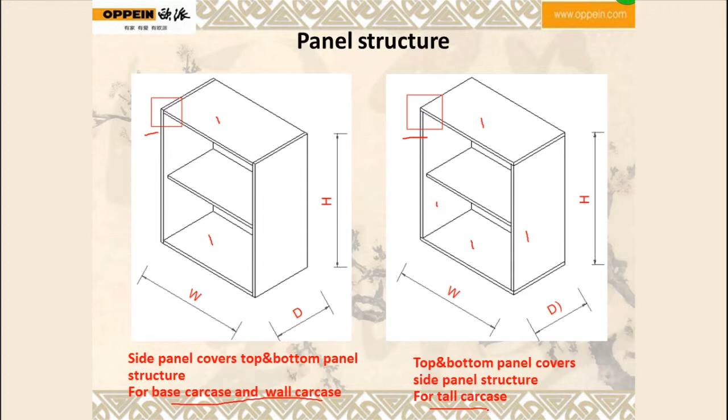Rotary door base carcass. This is the standard structure. This panel we call left side panel, and this is called top strengthened panel, and this one is thin back panel. The thickness is 3 mil. And this one is right side panel, this one bottom panel, this one adjustable shelf, and this one is aluminum rail.

On the right side here are the elevations of the rotary door base carcass. This is one door and this is double doors. And the dashed line, this one and this one, means that the hinge is assembled in this side, and this one means the adjustable shelf. So this one is left open, this one is right open, and this picture, the structure is K04 structure.

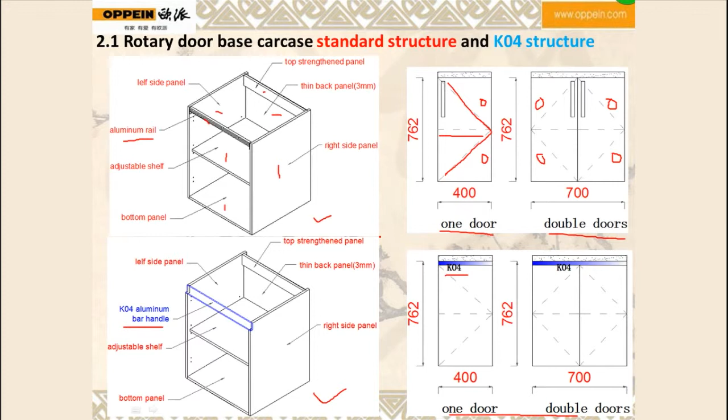Drawer or basket base carcass. This is the standard structure. The difference from the rotary door base carcass is that the drawer base carcass has no shelf, and here have a lot of assistance holes for installing the drawer or basket.

So here is the elevation for drawer or basket cabinet. This is the drawer code, and this is the drawer code. This is the code of multifunctional pull-out basket. This is the code of bowl and plate pull-out basket. This is the code of flat pull-out basket.

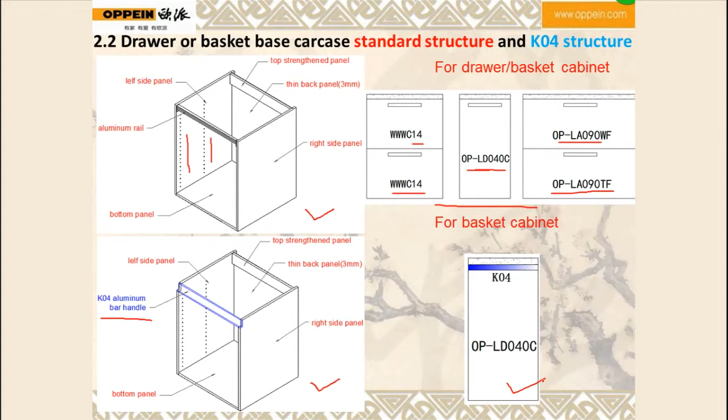And this one is K04 structure. The K04 aluminum bar handle here. And this one is the elevation. Base carcass K04 structure without shelf. K04 aluminum bar handle, have two. So it is for drawer or basket cabinet.

Just like this, this is two small and one big drawer. And this is double drawer. And this is double baskets.

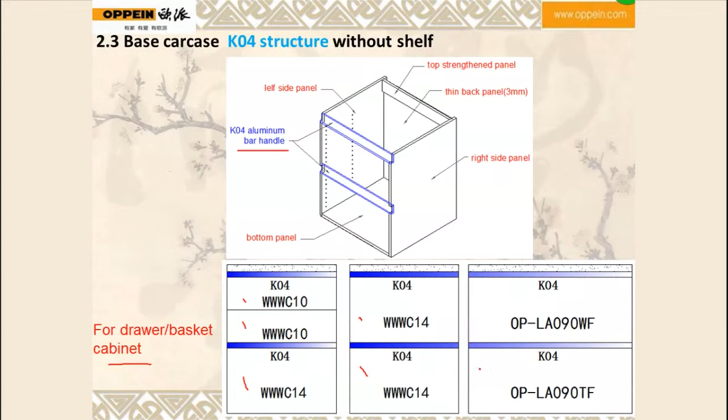Sink carcass. Sink carcass has no shelf, no back panel, and the top strengthened panel is in the back, and on the bottom panel there's a bottom strengthened panel. It is with aluminum foil, and the bottom panel is also with aluminum foil for protecting the panel from moisture.

This one is the elevation of the sink cabinet, and this one is the K04 structure of sink carcass, the elevation.

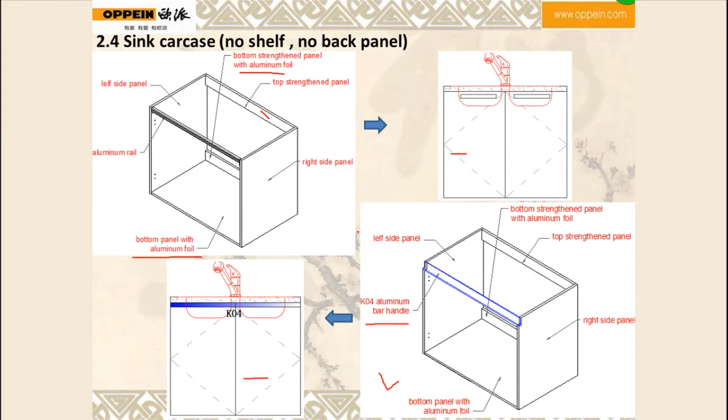Stove carcass. Stove carcass has a vent when the width is more than 600 mil. This is the vent for ventilation. This is the standard structure elevation. And this one is K04 structure, and this is the elevation.

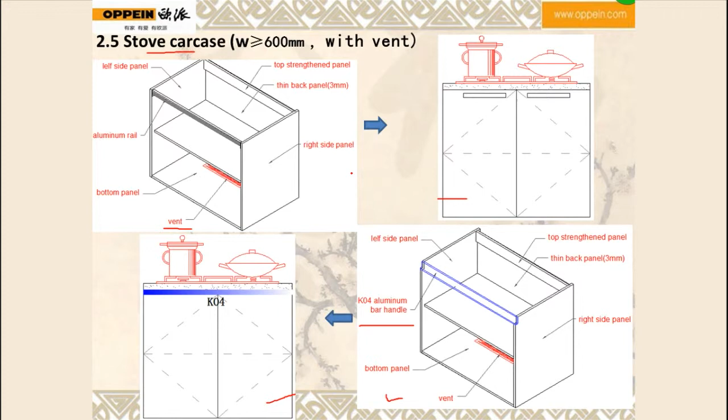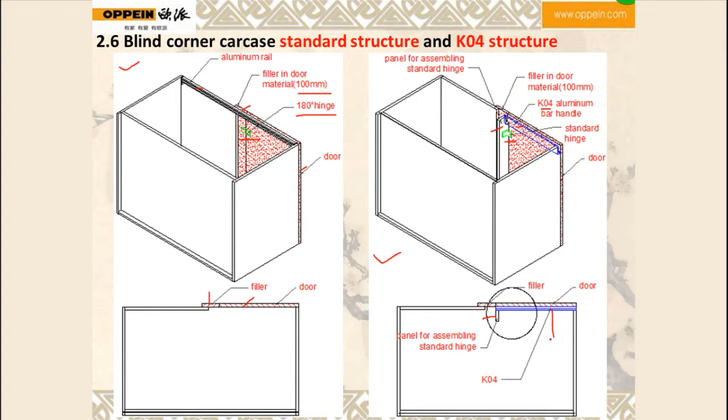Blind corner structure cabinet. This one is blind corner door cabinet. The notes are as below: 1. Standard structure uses 180-degree hinge. And when it is K04 structure, it uses standard hinge.

This one is lazy Susan basket cabinet. The notes are as below: 1. The back panel is thick back panel, thickness is 16mm. 2. The width of this cabinet must be over 900mm. The net depth, meaning the inside depth, must be more than 500mm, and the net height must be more than 550mm. 3. The door width must be more than 400mm.

4. No hinges. And this one is 180-degree turning basket cabinet. The notes are as below: the width of this cabinet must be more than 900mm, the net depth must be more than 500mm, and the net height must be more than 620mm. 2. The door width must be more than 450mm.

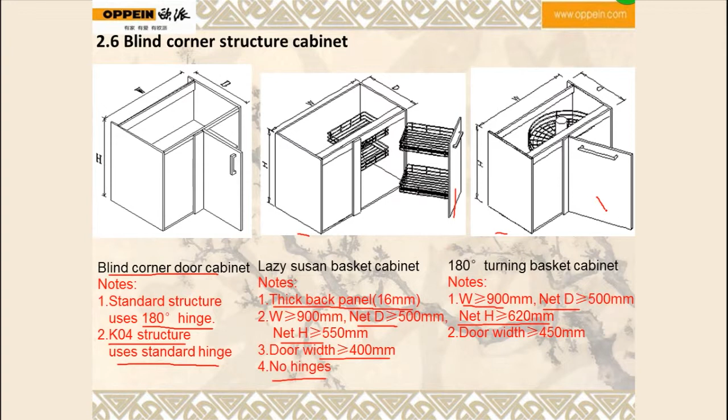Base corner cabinet. This cabinet is bifold corner cabinet, or we call it L-shaped corner cabinet. The notes are as below: 1. No aluminum rail. 2. With 3mm back panel on one back side. This one is 3mm back panel, and this one is 16mm back panel.

3. The doors that connect to the carcass, this one uses 175-degree hinge. The other one, meaning this one, uses bifold hinge. The code is BM-J14, like this.

And this one is angle corner cabinet, or we call it diamond corner cabinet. The notes are as below: 1. With top panel. 2. No aluminum rail. 3. With 3mm back panel on one back side. 4. The door uses 45-degree hinge, the code is like this. 5.

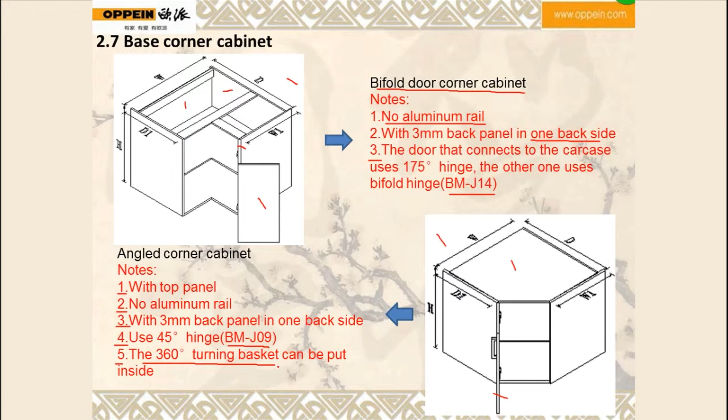This one is excircle corner cabinet. The notes are as below: 1. With top panel. 2. No aluminum rail. 3. With 3mm back panel on one back side. 4. Use 175-degree hinge. Here, the door used 175 hinge.

5. The incircle radius of this door is 300mm. The incircle radius is 300mm, cannot be changed. And only lacquer, acrylic, and this material can do.

6. Mind the handle. The handle in this picture is a 2-hole handle. So when we use a 2-hole handle, it must be vertical, like this. Or we can choose a single-hole handle. Or we can use an arch K04. Arch K04. 7.

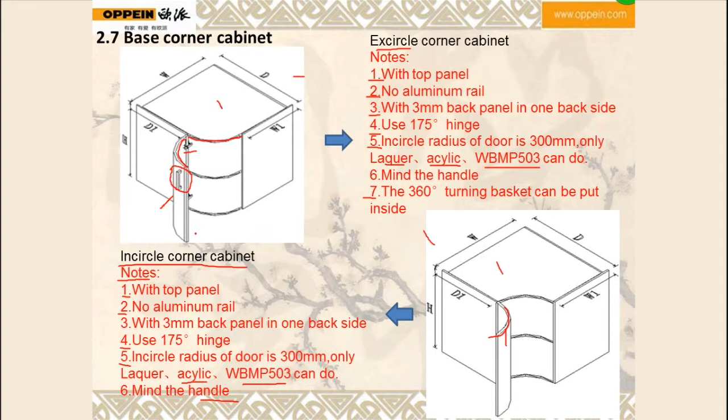When we use these corner cabinets, we need to make sure that the angle of the wall corner is 90 degrees.

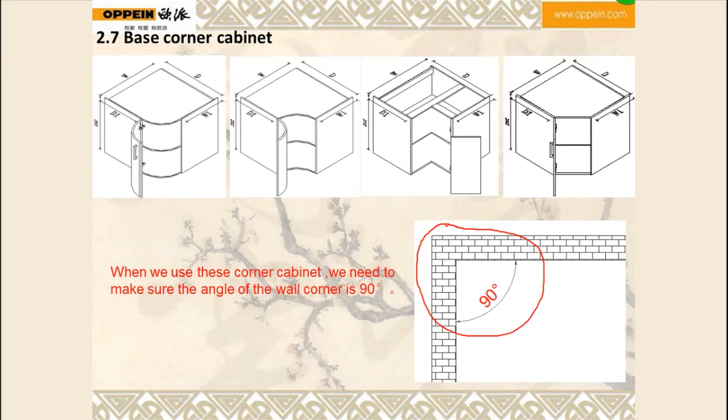Oven carcass structure. The standard structure of oven carcass has a 3mm back panel. But if you don't want it, you need to tell the factory. The form is about the installing way of the aluminum rail for the oven carcass.

There are 3 circumstances. Number 1, when the height is more than 720 and when the base carcass has oven, sterilizer, microwave inside, as picture 1 shows. Picture 1, this is oven. Then the installing way of the aluminum rail is vertical, and there's a filler above the oven.

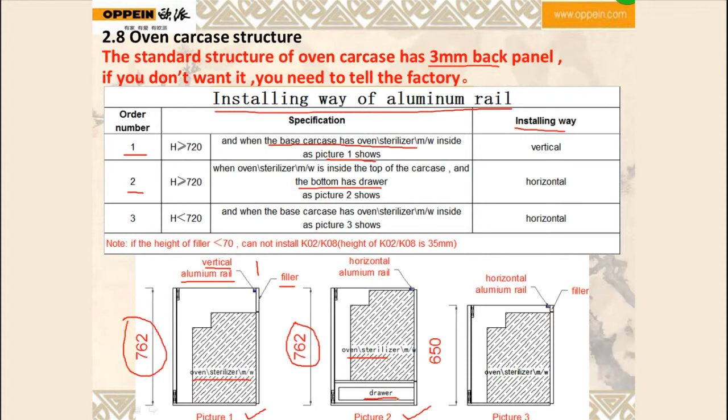Number 2, when the height here is more than 720 and when oven, sterilizer, microwave is inside the top of the carcass and the bottom has a drawer, as picture 2 shows. This is picture 2: oven on the top, drawer on the bottom. Then the installing way of aluminum rail is horizontal, like this.

Number 3, when the height is less than 720 and when the base carcass has oven, microwave, sterilizer inside, as picture 3 shows, then the installing way of the aluminum rail is horizontal, like this.